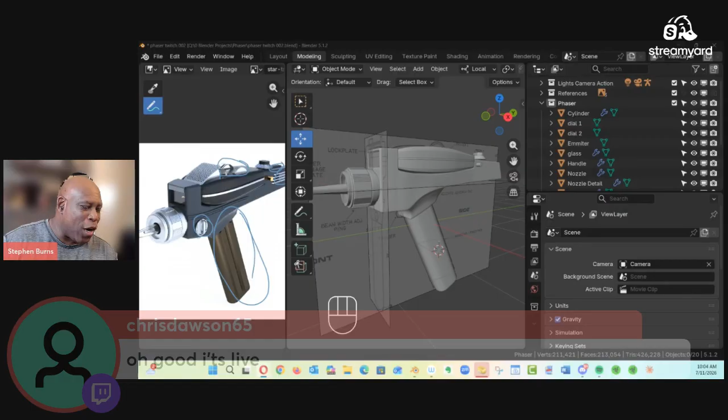So I wanted to share with you guys, I'm one of the newest team members of a podcast called Trek Worlds, in which Michael Hodges, who's here with us, is also part of that team. Michael, did you want to come on and talk about it a little bit?

You want to come on live? I gave you the StreamYard link. Trek Worlds rocks, yes it does. I'm really quite impressed with it.

Let me bring up a page, I'm going to go to, it's a YouTube channel, and I've got, let's see... oh, that's kind of different. StreamYard is doing something a little different.

All right, so let's go and search for Trek Worlds. Let's go ahead and type it in. Okay, so Trek Worlds, it should come up here. Let's see, is it coming up automatically? Let's hit the enter button. It should be coming up. I just did this the other day and it came up first thing.

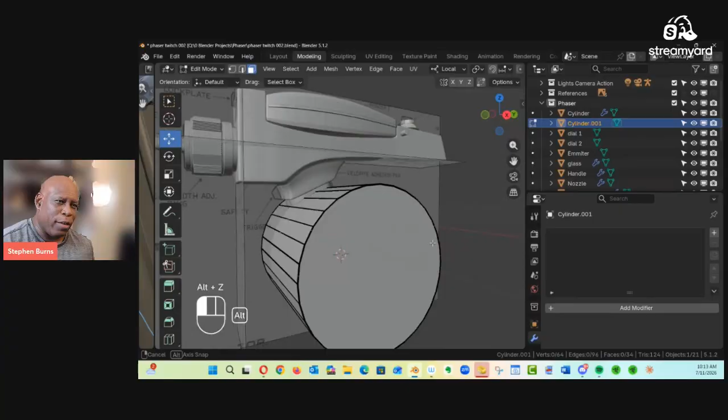Next, we're going to make this as simple as possible. We'll go into edit mode—tab key—and switch to face editing. I want to make sure I'm in X-ray mode. I deselected everything; if I rotate this a bit you can see everything's deselected. I'm going to select the faces—not the Z key, that's not what I meant to do. I meant to hit X and delete those faces. They're supposed to be gone now, but I didn't actually delete them, so X key and faces again. That's why it's always a good idea to get in close and rotate after applying a command, to make sure everything's been done—sometimes you think you're doing something that you're not. Good idea to get in close and inspect it.

All right, let's make this approximately the size I'm going to need. Go to the side view, go to X-ray mode, and basically what I'm trying to do is use these curves to simulate this curve in here.

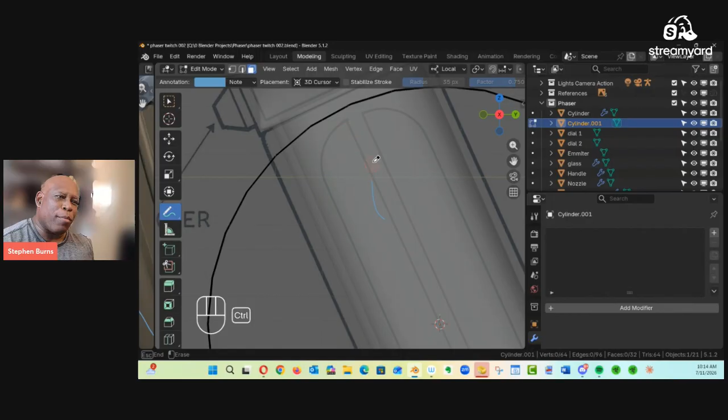And then stretch the rest all the way down, right? Just use my imagination, just looking at the basic primitives that I've been given. And what can we do with those primitives? I'm going to pull this out so I've got a double layer here. I like working with a double layer.

Okay, so hit the A key for select all. Let's hit the S key and scale it down. And let's bring it on up here like this. Get up here close. Scale it down. I'm going to take it to something.

I'm going to kind of match that curve in there as best as I can. And I think I can. Something close to that, I think that's almost there. How about S again and pull it up slightly? That could work.

All right, let's see what I can do. I think I may have to do this a little bit of a different way. Probably, let's do this, I'm going to pull it down this way. Let's take it to right about there. Maybe I had it right the first time. I'm overthinking it now.

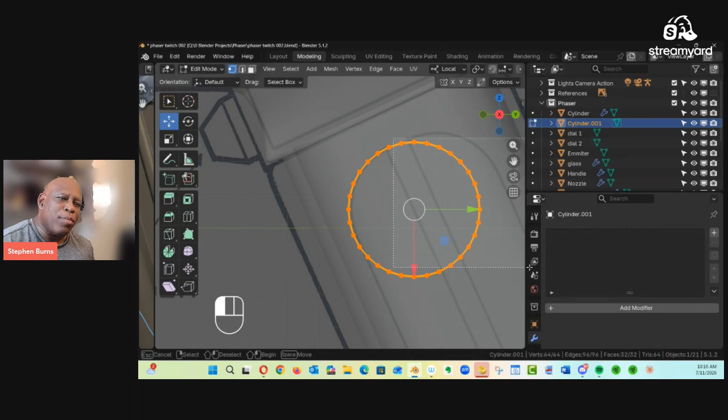All right, so if I select these points here, and I'm also going to select these points here. It's going to be a little bit different than how I plan to do it, but you get the idea. Let's kind of basically get here. All right, so what I'm going to do is this.

I'm going to get rid of these points, I'm going to dissolve them. Control X dissolves them. I dissolved too many. I want to keep one more over here. I'm going to undo it. I want to keep that one. So...

I'm going to keep this one here. Let's go select this one. Still... oh, control, there we go. Control right click. And let's select all these here. That's good. Okay, so control X dissolve. That's what I want. All right.

I want to go grab this, bring it on down. Now I've got two of these here. So what we'll do is this. Let me undo it real quick. Let's go grab all these points here. Let's just get rid of them.

So I have a flat plane. That's going to make life a lot easier. Go grab this point here, bring it on down. Let's grab this point here and just kind of push it into place. This will all make sense in just a little bit. Grab these and just bring it all the way down to here.

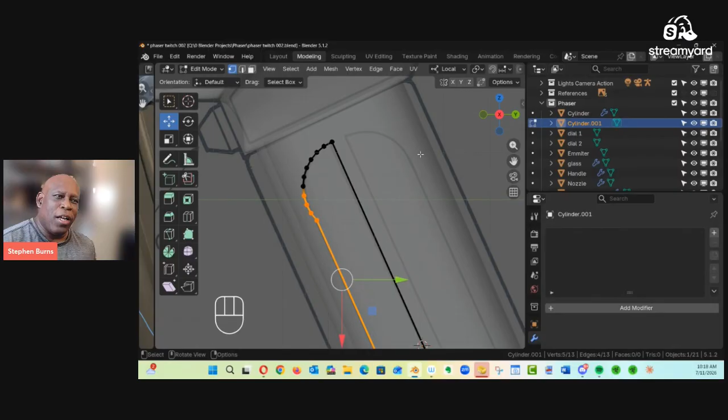Now, in Blender, this is going to be easy. We have our loop tools, a plugin that comes free with Blender. Right-click, loop tools, go to flatten, and it should have flattened that out. All right, we want to flatten that out. Let's see, on the x-axis. All right, it's not working.

All right, so we're going to do it this way. I'll tell you why. Let's rotate it, select all. Hit R for rotate, we're just going to align it with the world orientation. It's going to make things a lot easier.

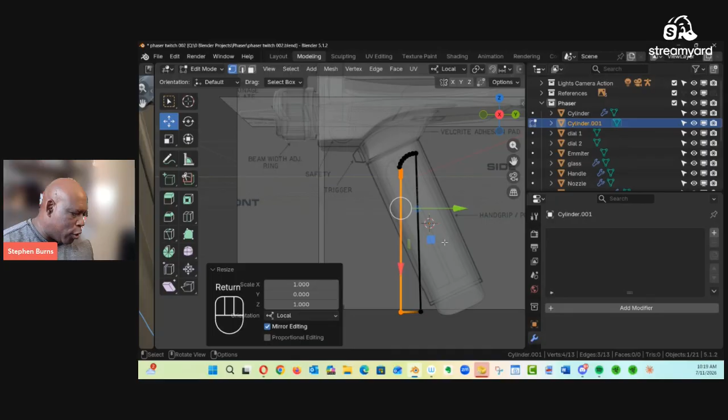All right, then we'll come back. We'll grab all these and that. S key for scale, Y for the axis, and 0 to flatten it out. Enter to commit the changes. And we're just going to push it in place. There we go, that works, that works. Okay.

All right, so we're going to end up with an N-gon here, but we kind of don't care, primarily because we're going to integrate this in with the handle. We could make this into something that's 4-point polys everywhere, but we'll deal with that a little bit later.

All right, so we need a face on this. Go to my edge editing view because I deleted it accidentally earlier. I'm going to get rid of that. With all that selected, let's flatten this out on the Z-axis according to this here. So S key, Z, 0, just to make sure everything's nice and planar. And hit the F key for fill. Okay, and there's our face.

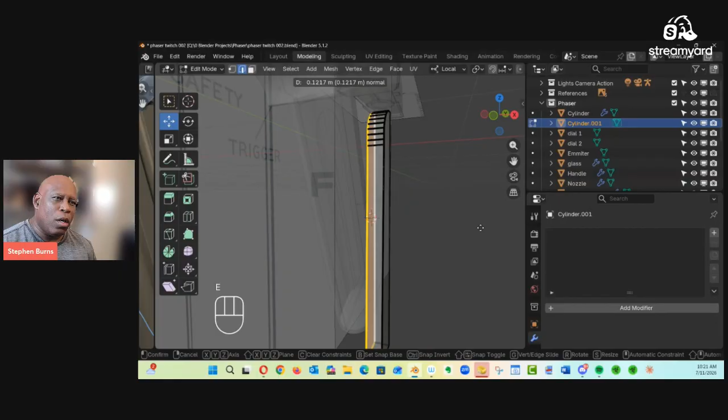All right, and then from here, let's go ahead and give it an extrusion. Yeah, it looks pretty good. Let's make sure. Get out of X-ray mode, see what we got. Yeah, that looks good.

All right, let's go back into our side view. X-ray mode, A key for select all. I'll have to do a little bit of manipulation, but that's okay. So we hit the R key, something like this, it's kind of getting a little closer. It might have been easier to hit the A key.

There we go. Go to orthographic view, and let's take a look at my lining here. So R, line it up a little more accurately like this.

Go to my edge editing views. I've got an edge down here. Let's grab this and place it right where it should be. Let's grab this edge here to there. And that looks pretty good up here. If I select all this here, push it on down.

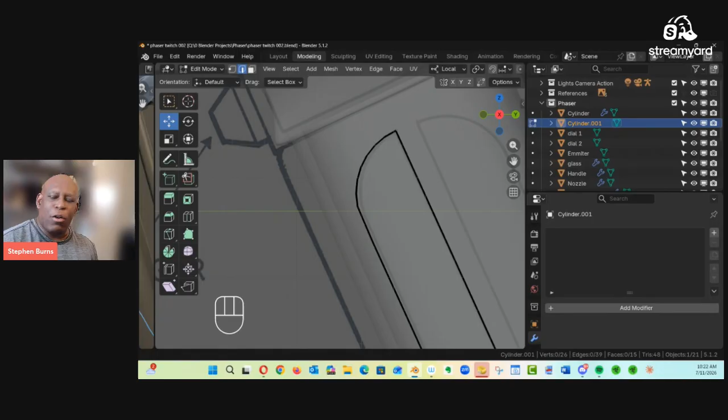If I grab all of that, actually, what we'll do is I'll use my proportional editing. I'll grab one of these little edges here, like this. As you can see there, go to the side view, and then turn on proportional editing. So the O key is a shortcut for that, or I can hit this little symbol right there, it looks like a ring around a little dot. That's proportional editing. So when I hit the G key, I can adjust the size of my falloff and adjust this to get it just exactly right there.

Okay, that little edge there is just a teensy bit off, so I'll just kind of move it into place. That's good enough. We're done.

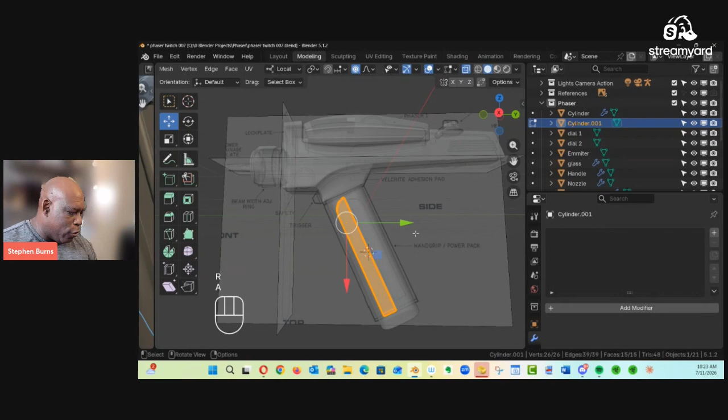All right, we'll do one last little thing. Let's go ahead and bring this straight up and down again, and I'm going to flip it, rotate it. Let's hit the A key first, and then we'll hit the R key, and just get it as vertical as possible.

Let me go to my orthographic view. I'll use one of the lines to kind of line it up, you'll see why in just a minute. And to help me out a little bit, I'm going to bring this down, set it against one of these little virtual lines there. That looks pretty good.

R key, and just rotate it just slightly like there. I think that's it there.

All right, now the reason I did this is I want to go to my modifier. I want to go to a mirror modifier for this. So let me get out of here, go to this mode here, right click, set the origin to geometry, because the origin is way up here in the handle, that's where we originally created it. I don't want it up there. So right click, set origin to not the 3D cursor, but to geometry.

Right, and this is interesting. I don't know why it's setting it up here. I don't see anything up here. Let's do it again, right click to geometry. Interesting. That's not exactly where I want it.

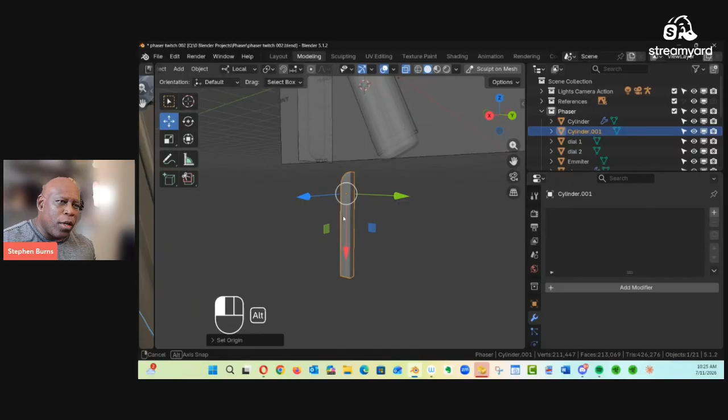Here, this is another way we can do it too. If I want it directly center, go to my edit mode, everything's selected here, and it's still selected there. Is there another? Interesting, I wonder if there's anything extra in here. I'm expecting this to be dead center, and I'm trying to figure out why it is not.

I'll look at my options up here. Median point's correct, I don't see any other. If I hit the A key, I see nothing else up here. Interesting, I have to figure that out later then.

So I'm going to hit object mode, go to my mirror modifier, generate mirror. Let's go on the... you know what, let's do this, let's hit Control A for rotation and scale. Okay, now let's hit the Y axis to mirror this on.

And if we go inside edit mode, we can do this quickly this way and just move it like this. We'll just eye it. Now that I've got it aligned the way we need it, all I need to do now is come up here to object mode and just move everything back into place.

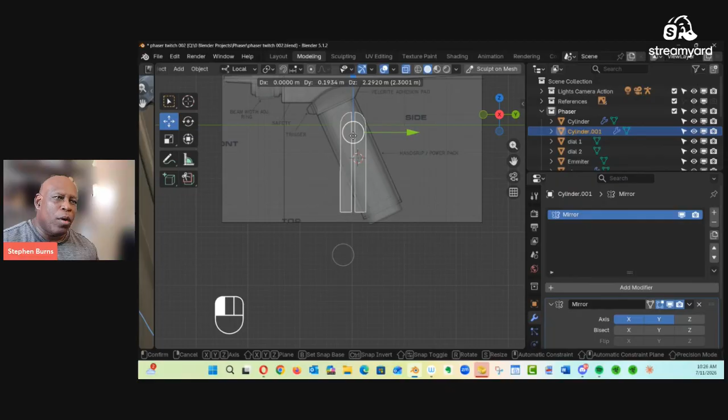So go to the 3 key, pull it on up, or rotate it, kind of get it approximately right, and then we're going to get in close again and just move it manually right there. So it's a little bit off from rotation, no big deal.

R key, rotate it right about there, maybe a teensy bit more. There, okay, let's take a look at it. Let's get out of X-ray mode. Push it on in like so.

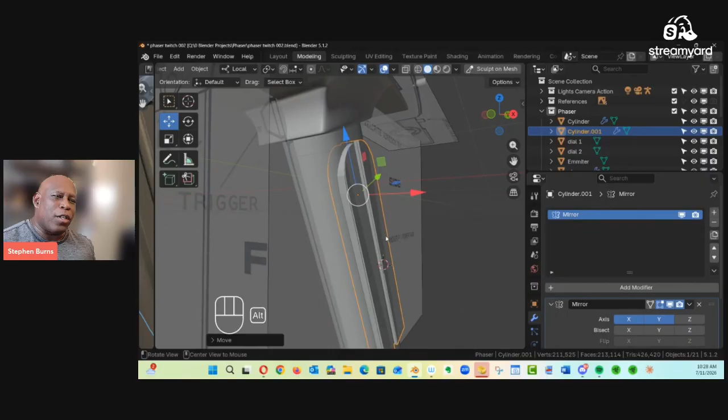I'll deal with the thickness in just a minute. I'm gonna push it in. I want to rotate it - this is the reason why we went to the modifier. I want to rotate it so it's showing that it's moving along the plane, the surface, flowing along the surface of the phaser.

So come here, go to edit mode. I'm going to select all. Let's go to my rotation option up here, and let's just go on the Z-axis like that, yeah. Okay, I got 2 axes selected here. Turn off the X, there we go. I inadvertently hit both the X and the Y down here. Actually, I didn't, because X is what it is by default - I just didn't turn it off.

Let's see. There's some comments here - haven't worked with the Galileo in a few weeks. Well, it wouldn't hurt to show it anyway. From Michael, let's see - Chris says the circle you made at first.

Yeah, well, it was. I used a cylinder at first, just rotate it so that it's facing directly at us. Then I utilized that curvature along the sides of the cylinder to create the shape.

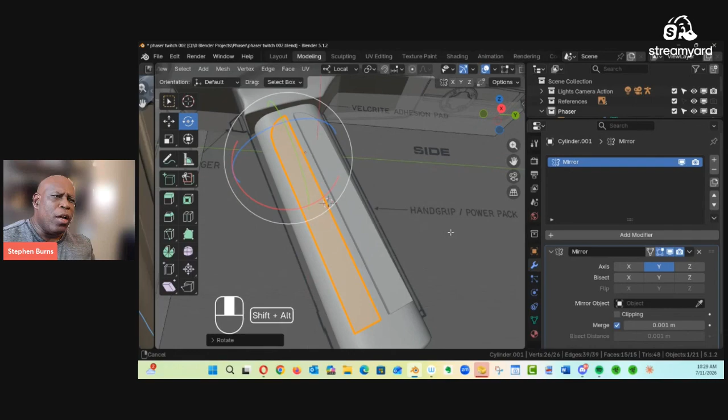He's saying it's using that as a center. It is, that's right, it is. Which I didn't expect it to, because whenever you select something in Blender, it goes to the dead center of whatever it is that's selected.

So the fact that it's moving up here, local - let me see something. Orient - yeah, this is perplexing me a little bit, because it should have gone directly to the center of my object. Let's say individual origins - see, that's a little odd. To me, I would think the center would be right down here in the middle somewhere. So that's what's throwing me off a little bit, but no big deal.

I can go to normal view. I know what Blender is doing and why. I'm going to hit the A key one more time. Just so I can - I think I want to rotate it just a teensy bit more, like that. Okay, that works.

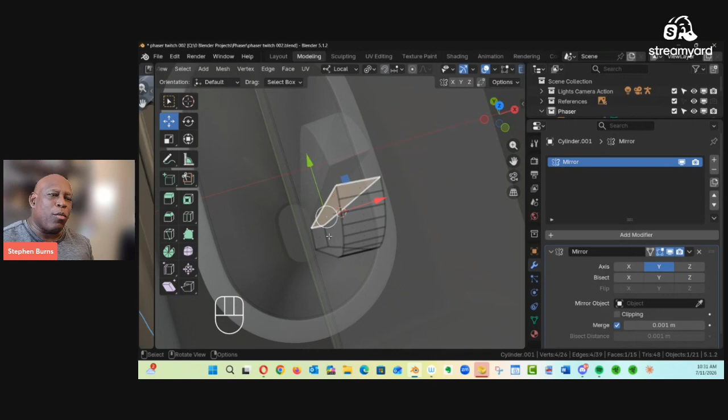Okay, that works. All right, so the inside of that piece, if I come over here, I want to grab the front face. If I can go to my X-ray mode - let's see if I can, there we go, got that piece there. Because you may want to use this to put batteries inside, so I don't want this back face too deep into it. So I'm gonna - I grabbed the wrong thing. I want this face here. That's what I wanted.

And if we go to the orientation instead of local, go to normal, it'll adjust the orientation to the face, the normals of this face here. So I can just take it and push it up like this. There we go - see, and that'll leave you plenty of space to put wiring and batteries and stuff inside. So the idea is to 3D print this.

Now I think probably an effective way of dealing with this now is probably to bevel those edges a little bit. We could put a bevel modifier on here, right? We could put a bevel modifier on here. So let's give that a try. Let's go over here and go to object mode and get out of here. Go to solid mode and let's give it a bevel. Let's see how well it does.

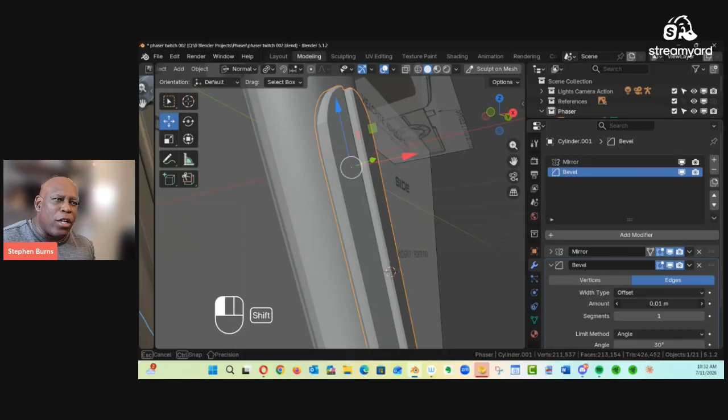Okay, yeah, it's going to do great. Okay, adjust this, holding the shift key down so I have minute adjustments like this. See that? Okay everybody, I'll turn it this way so it's easier to see. Holding the shift key down, give it a few more segments - I like to keep it odd numbers like this.

All right, and this is going to be helpful because if I want to smooth this out even more, right, and I'm looking at my phaser, and this actually is going to be going in a little deeper like this, right about there. Yeah. And I think I'm going to move this over a little bit - I think this is a little bit too far. Probably, well, maybe that's okay. Okay, maybe that's okay.

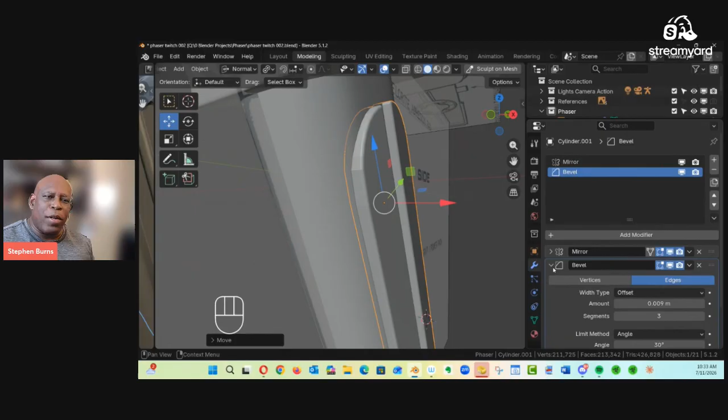If I wanted to smooth it out even more for the purposes of 3D printing, let's try putting a subdivision surface on it. Let's see how well it works. Yeah, there it is. That's what I'm talking about.

I'll go up to a level of 2. Yep, that's smooth. That'll 3D print just like this. Why? Because if we right click on it, it should always be under the shade flat option, right?

And we are in shade flat for everything here, which means what you see is what you get. All right, handle's done. I can merge these together through a Boolean, but I won't do it just yet, just in case I want to make modifications later on. You don't really need to—I'll share why later when we actually export this as an STL file.

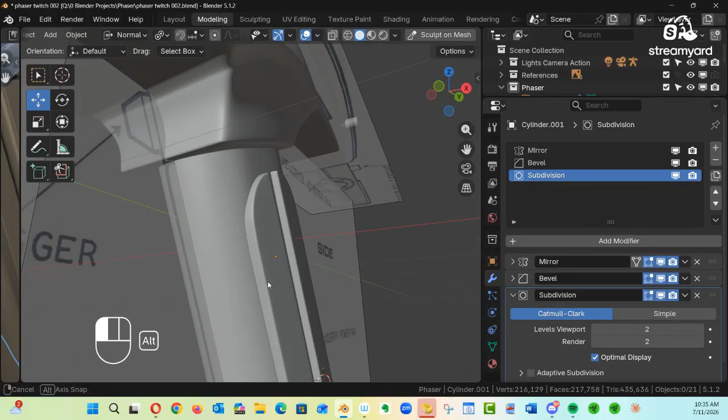Okay, so when you export this out as an STL file, you can tell Blender to automatically merge these together in the export process. So I don't really need to Boolean them.

What I will do is select what I call the handle detail right up here. Actually, it's called a handle now. If I click on the detail, it's called cylinder, right? So I'm going to call it the handle detail, or details. There we go.

And then I'm going to shift click on the handle, hit Control P, and parent it. All right, so now this is parented to the handle.

To help keep me more organized, I want the handle to be in its own group. So with both of them selected, I'll select this one here, shift select the handle, and hit the M key, and make a new collection. We're going to call this one handle.

Okay, now we've got the handles in here, with the handle details parented to it. Now we can keep things organized.

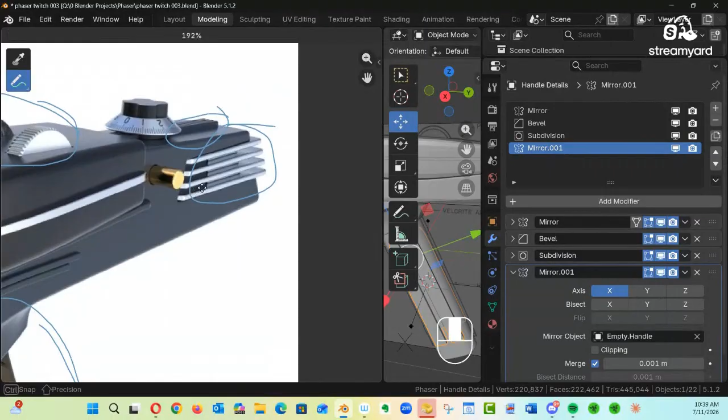Let's start doing the details along the sides of the phaser, right along here—see that? So these are heat sink grids, if I remember correctly. Along with these back here, we've got an indentation going into the back of the phaser. You see it's actually etched into the big square face, and then the heat sink blades are placed back there accordingly.

So that's next—let's do these here, then we'll come back and do the back.

Okay, so first thing first, let's go do the main phaser. Go to the body of the phaser, hit the 3 key, go to the side view, turn on X-ray so I can see through it. You can see there are 3 of them, right—let me add my little annotation. I've got one here, another one here, and then one right down here, going all the way across to the front. All right, so let's go have some fun.

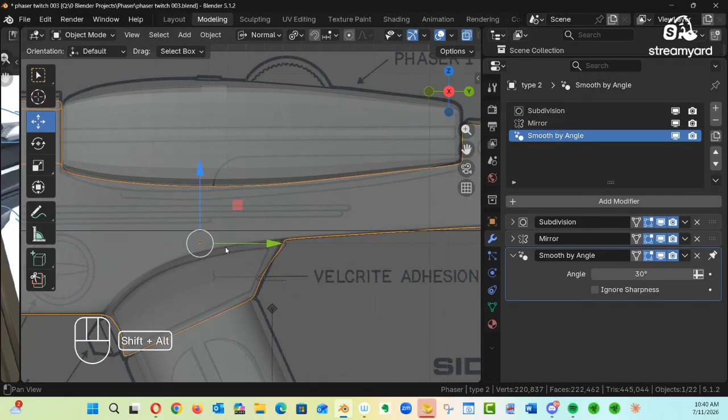All right, so I think what I'll do is use a plane. We can use a good old plane. So there's the body of my phaser here, Shift S, cursor to selected, so I can bring my plane to right about here. We're going to make, let's see what I've got up here organized inside my collections.

I got the phaser itself. I'm going to need to call this one phaser type 1 because I'm going to separate this from the type 2. So phaser, let's get organized now.

Now I need to go to my type 1 and all the components of the type 1. So that there, this here, holding the shift key. Let's see, am I still in? Giving me a hard time here. So grab those there. Yeah, I think it's just those two for the type 1 phaser. Control and get rid of the body.

M key for merge, now just hovering over the selected objects. M key, new collection, and we're going to call it phaser. Keep it consistent. Type 1. There.

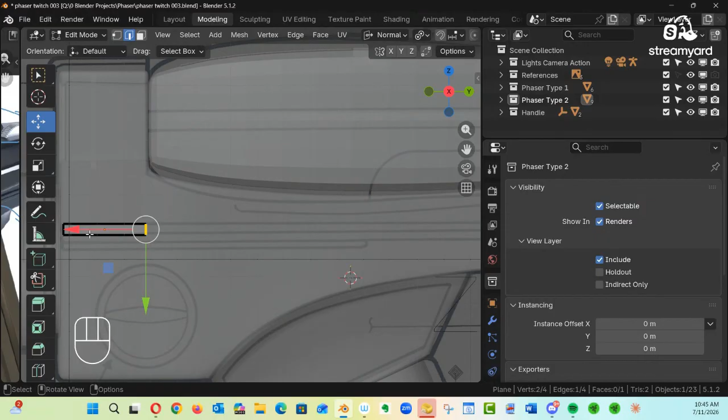And let's go back to X-ray mode. So 3 key, X-ray mode, Alt-Z. Get back into edit mode here. Edge editing mode, grab that there. This part you're going to love. Bring this on over like this.

Okay, I'm looking at the location of this thing. That looks about right. This looks like it wants to go up that way a little bit. That's okay, we can do that. And if I look at my phaser in my hand, while I'm looking at the drawings, all those lines are consistent. They're not... they're tapered just slightly, aren't they? They are tapered just slightly. All right, fine, so what we do is we're gonna just taper them just slightly.

So hit, you can go to the scale tool if you want and just push it up like that. It's a slight taper.

Go to X-ray mode, and it's good. All right, I think this is going to work.

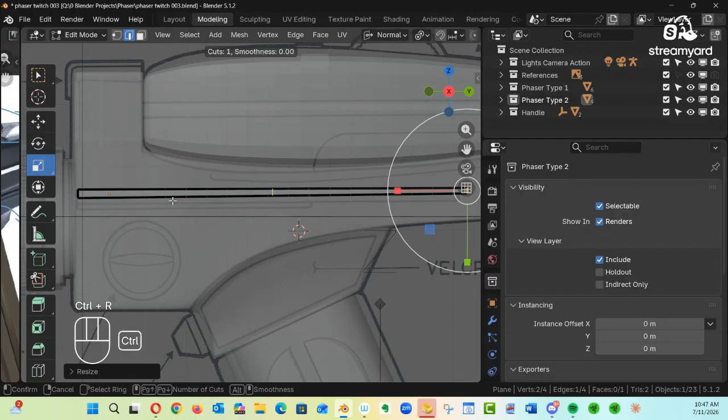So now this is what we need to do. We're going to do something kind of interesting. I'm going to subdivide this. Control R for slice, and roll my scroll wheel like this to get a bunch of slices in here. Then click once, click again, and commit to changes.

I'm getting close, and I'm going to slice it again. Control R, but this time horizontally. I'm going to add one more slice like this. I think this can work. Then click once and click again.

Okay, now this is what we're going to do. We're going to shrink wrap this to the body of the phaser, and then we're going to extrude it out of the body of the phaser. Isn't that fun? So let's go to work, let's get out of here, go to object mode.

Now let's turn off the references temporarily because they're a little bit in the way, and let's pull this panel over here to give us a little more real estate.

Okay, select this detail. We need to rename this one, right? Let's go back to the phaser type 2, it was the plane. I'm trying to get it to react to me clicking on it here. There it is, okay.

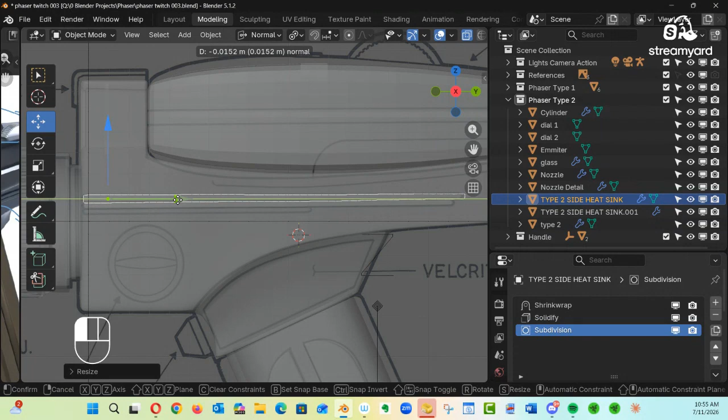Like so, and then push it on over like that, just to match what I have in the photograph. And this one's going to be stronger, so S key, Y. There we go. That works. So if we get out of that mode, see?

1, 2, we need one more, right? Okay, go to the 3 key on the keyboard, X-ray. Let's go get that one on the bottom - heat sink number 2, that's number 1 here. So we'll just hit Shift D and then the Z key, move it straight down like this, like right about there.

Okay, now what I want to do - this one's slightly thinner, so I suppose I'll hit the S key for the scale, Z key for the axis to restrict it to, make it a little thinner. S key for the scale, and then the Y key for the axis to restrict it to, and bring it down. Let's see, it's about there, like that.

Push it on over, get in a little closer, maybe move it up slightly like that, move it over more like that. Okay, let's take a look. Yeah, there it is - done. That one's done.

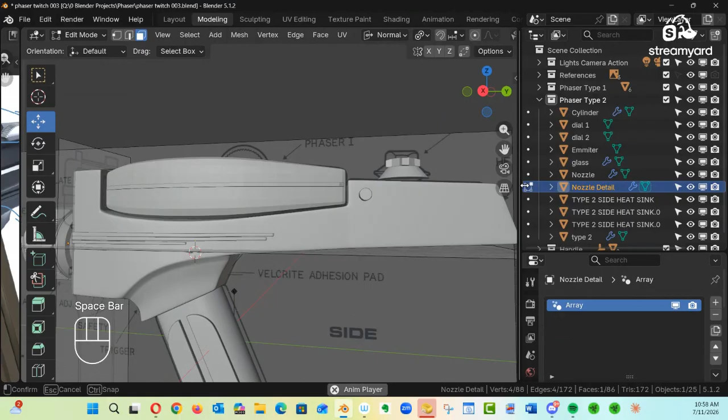This one's going to be fun, because let's select the phaser itself. Okay, let's get out of there and go into edit mode and let's strategize. Pull this on back. Okay, we're going to strategize this here. Make sure I've got the right thing selected. There we go. All right, let's get in close. So let's also go to X-ray mode.

All right, so let's think about this. If we have those heat grids in the back, the heat grids are basically big - they're sunken into kind of a square shape, right? So back here, if you look at this - somebody should go to my annotation - this whole shape here is etched out, this whole shape in here is kind of etched out. And then you've got the four blades, heat sink blades, that are placed within that little space in there, and of course they hang out from the sides and they hang out from the back a little bit.

Looking at my phaser and touching my phaser, they do extend out beyond the sides, left to right, and also to the rear as it's showing here. So we're going to start with that first. Now we can actually create that out of the geometry that we have here - we do not have to add a boolean or anything to it, right? We can just etch it right into it, or build it right into the shape that we've got. So this is why polyflow and keeping everything in quads is so important.

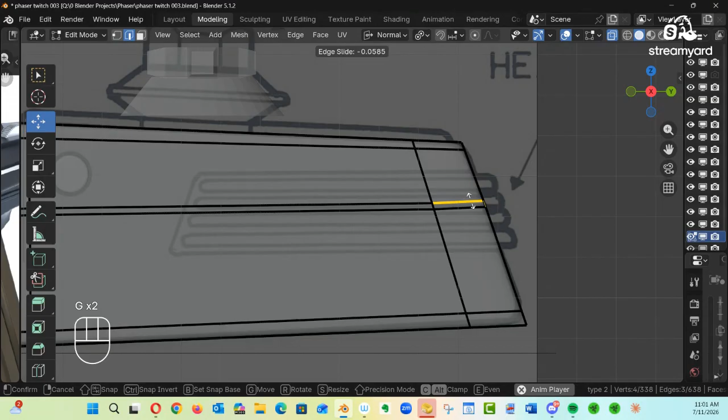We're just trying to align this up to the plates here. So double G. There we go, that looks good. See? Just trying to get that looking as consistent as possible.

Now here we go, 3 key on the keyboard. Let's go ahead and create some geometry in which we're going to etch this out. So let me go back to my annotation and let me go to object mode. There we go, annotation, and just erase all that extra that was in there out. There we go, and let's go. All right, let's go back to edit mode.

Just getting rid of the visual distractions. All right, now Control R, I'm going to slice it. Why? I need to represent something for this side. So if you get in close here, this outer edge is the area that's being etched into the phaser. These other little sections are the actual blades, heatsink blades. With that there, see, I've got that whole loop.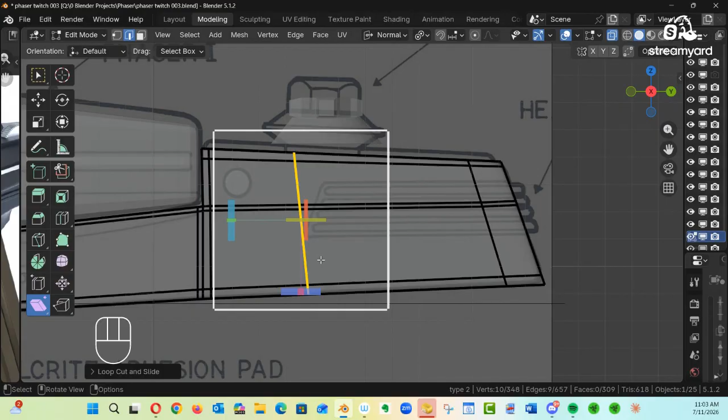It's a quad loop. We're going to come down here to an option right here called shear. Select it. Once that's selected, I look at the area that's parallel to or perpendicular to the very thing I want to shear, and then I just slide it like this. And there you go.

Done. Go to the move tool. We're not going to go to the move tool because we don't want to mess with the shape, right? We want to keep the shape. So it's double G, and you can slide it anywhere along that shape without affecting the shape. So right there is where I want to be. Done. Maybe I do a little more. Double G and slide it right about there.

Okay, need one for the top. Control R, put it there. Done. Control R again, here. Done, okay. Did it mess with the shape of your face? Or no, it's probably going to add to it or benefit you because adding a little extra geometry that'll help keep the shape. If you're not sure, go to object mode, get out of there, and just take a look at it. And it looks great, looks clean.

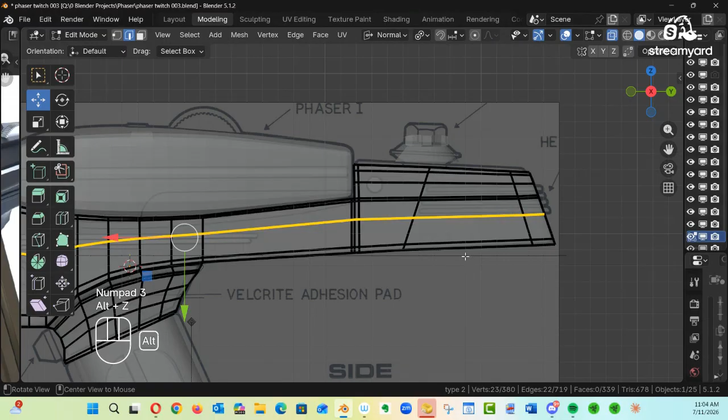All right, it's looking great. Let's go to tab key, edit mode. All right, now let's go back to our side view and x-ray mode, and let's go finish this up. So we've got everything exactly where we need it. So 3 key on the keyboard, and to go to face editing mode, and we're going to select all the appropriate faces.

This is what we need. Right? This is what we need. Now, what we do is we're going to go etch into it, and we're going to etch into it by using an extrusion method.

So Alt E, not the regular E, and then select from the options, extrude faces along normals. Select it. We're going to bring it in just a little bit. Just a little bit. We need to bring it in more. I'll tell you why we're not bringing it in more.

You see these faces here. Actually, let me undo it. Control Z. Now let me hit Alt E again and extrude along normal. If I see those faces moving in too close to one another, they're going to start to overlap like this, and it's going to screw you up. We want to go in about this far, but you look, the faces, because Blender's trying to get those edges to match the flow of the shape. So they're overlapping, so only going to do it to right about there.

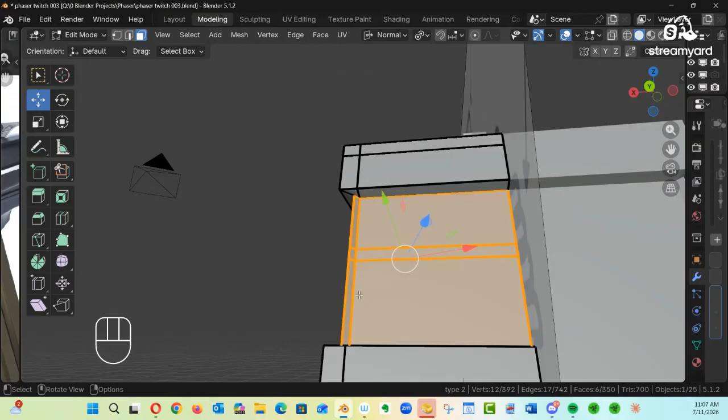It might help to turn off the subdivision surfaces mode. Okay, select all of these here. That's all I want. And all we want to do is right click, loop tools, flatten.

So this is not flattening the way that I wanted it to. Very odd, by the way, loop tools flatten is usually religiously accurate, and this entire face should have just flattened out. Let me do it again to see if maybe I have something else selected. Go to X-ray—no, everything is exactly correct. So this is odd with the loop tools. It shouldn't be doing this. Right click, loop tools, flatten. And now it did it again. Huh, it's usually pretty good.

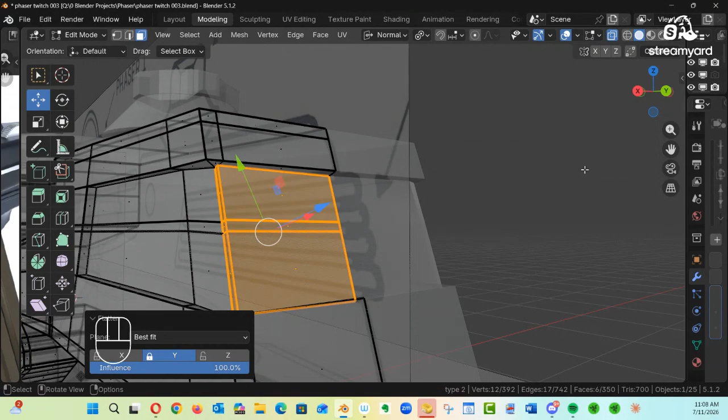Let me go to the flatten options. Influence 100%. Let's do it again—loop tools, flatten. And it just keeps doing it. Very odd. All right, so what I'm going to have to do is a little manual work.

So it's these faces here that I'm concerned about. I suppose, since I'm in normal mode, it has the z-axis along its normals, which is exactly what I want. All I need to do is go at an angle here, get out of this mode, and just push it up like that. There we go, see, it's starting to flatten out here. That's what I was trying to do. So maybe if I do this, it'll help a little better.

So before I do anything else, I'm going to grab that along the top, deselect everything on the bottom, right click, loop tools, flatten. There, it flattened it along the tops.

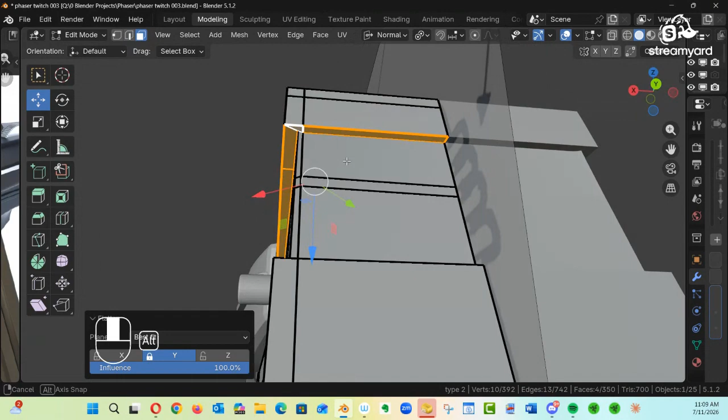Let's go to the bottom. Grab that one, holding shift and control to grab this one. Right click, loop tools, flatten. There, that flattened out accurately. All right, let's see if this will do it now.

Grab this here. Right click, loop tools, flatten. That's still having a little bit of a problem, but it's no big deal. I can easily manually correct that—I think all I do is grab this point, just grab that point there. I think what I'll do is pull it out right there. I think that'll work, pull it down a little bit like that.

And eye it a little bit. We can see this is a little bit off in the back. So if I go to my edge editing mode, grab these edges here, hit double G and slide them down. Grab this one, double G, slide it down to kind of keep the flow linear in this respect. Okay, that works, we've got it.

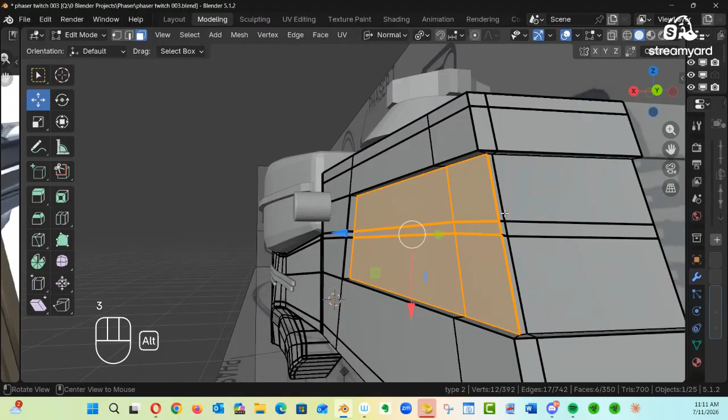Now what can we do? Grab all these faces and grab all these faces here, and we need to be not in normal mode but in global mode for this one, because everything is aligned to the global space. And just push that in like this. There you go, so just understanding polyflow.

Select these outside faces, and I'm going to right click, loop tools, flatten. Looks like it's already flattened. And just push these in like so, just eyeing it. Okay, that did it.

Let's see if there's any questions here. And you know I mean it. This is awesome, good, thank you Chris, and everyone.

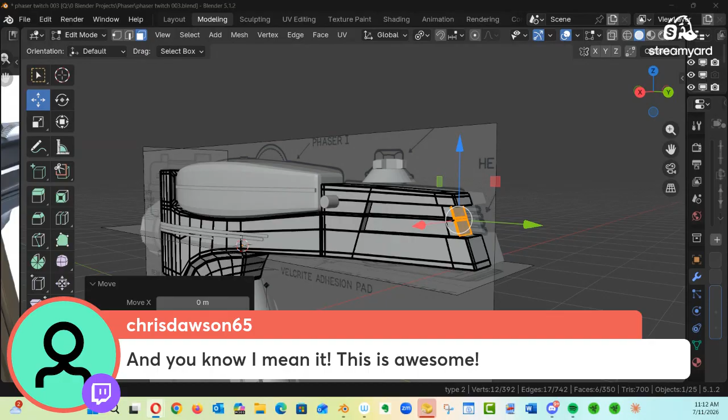Yeah, once you understand how Blender works, you just use your head and think it through. I suppose what I could do, because these two edges are kind of close to one another, I could grab these edges here, grab that and this, holding shift and control, and then just double G it and slide it on over like this, just to give it some breathing room. Okay, that works.

All right, so it's done. Now here's the fun part—let's get out of here, go to object mode, and let's take a look at this. It looks good. Let me pull this panel out a little bit. References, turn off the references. Now let's turn the subdivisions on for the references. This is what I've got.

All right, so most people, when they go to subdivision surfaces, they panic. Let's understand what subdivision surfaces are. You guys are probably used to CAD-based software, where the CAD-based software is creating the corners for you. That's exactly what subdivision surfaces is—it's a combination of box modeling and CAD-based cornering, all based in one. So what we need to do is tame these edges to be accurate. So if I come over here, go to tab mode, go to edit mode, right?

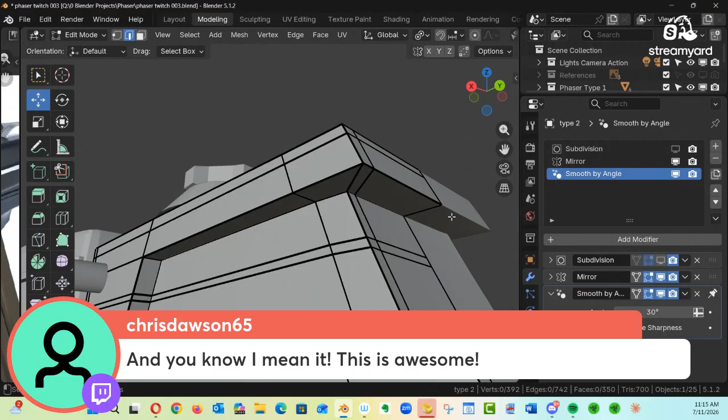All I need to do is find a way to control these edges. The best way to understand this is by turning off subdivision surfaces temporarily. I need to tame these edges in here and the edges out here on the left-hand side. I can tame the interior edges pretty quickly, because everything is a continuous connected loop with 4-point polys.

Control R, put it here. You see this? I can slide it in here to tame this inner edge. I'll place it here like so. And if I turn it on, see, I'm starting to tame that inner edge.

Let's go tame the edge up here, right? At the top. Control R, click and hold, and drag it to tame that edge. See that? See what's going on? Now we need to do this one back here, right?

You look at this curve, we need something perpendicular to this line to tame this curve. Control R, left click and hold, tame the curve until you can make it as round as you want or as hard as you want, like that. All right, there we go. Done.

You've got the software interpreting the curves that you want. So you're going to need these beautiful curves to 3D print, and you've got the edginess that you're looking for.

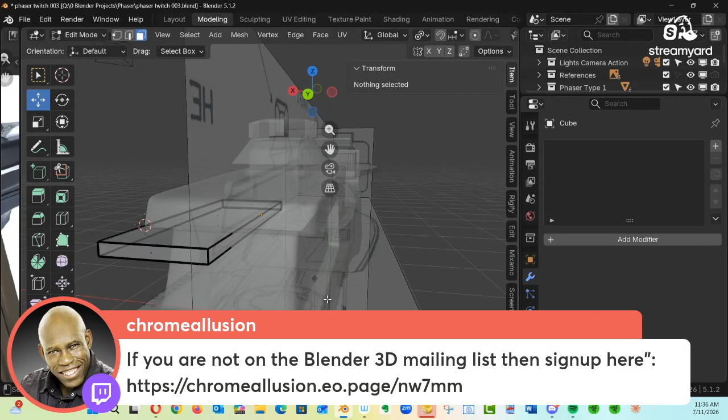At this point, we're going to go back over here to object mode and go to my mirror modifier, add a generate mirror modifier. It should mirror automatically by default right there. But if we go inside here, once again, go to my edit object.

Hit the number 2 key to select all of my edges. I want my orientation to be exactly where the orientation is selected now. So Shift S, cursor to selected, get out of here. Now the cursor is placed exactly where I want it to be. Go to object mode, right click, set origin to 3D cursor, and boom, there you go. It's perfectly aligned.

If we get out of X-ray mode, you can see exactly what it looks like. And then from here, we're going to come over to my mirror modifier and make sure clipping is activated right over here. Make sure clipping is activated. That's going to help. All right, cool.

I'll keep my eye on the chat box.

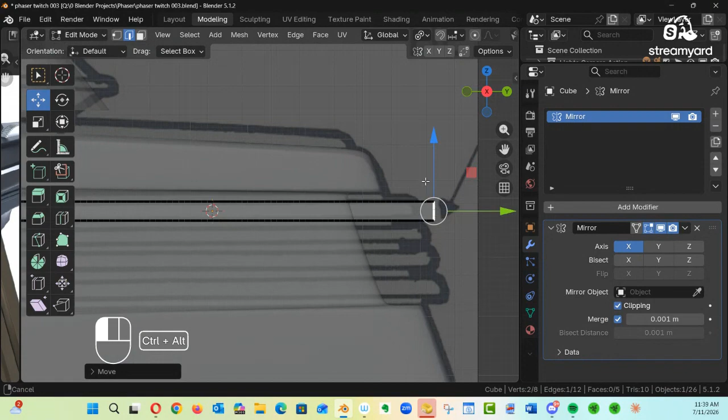Okay, let's go back to my X-ray mode, go to side view. Let's hit the N key to make that panel go away, give myself some real estate. And if I get in close, I want to kind of match. I want to make sure I go to face editing view and select that entire face. See, I want to select it right about there.

We'll do the same thing here. Let's bring it back a little bit more like that. I think we've got it.

Okay, here's the fun part. So I want 4 of these, and I want them to be tapered along to the shape of the phaser, or the phaser indentation that we have back here. Okay, so I want all these faces to kind of flow along with the angle that we have in the back and the implied angle that we have in both the interior and the back portion of the phaser here.

Okay, now let's add another modifier to this. Let's go back to object mode, back to our X-ray mode, go to the side view, and we're going to add a modifier called array. So I want to array this 4 down. We want to do as little work as possible, time is money.

So add, generate, go to array. Very top is in alphabetical order, and I'm just going to go array legacy, it's all I needed. I want to array it down the Z axis. Here's the array, it's by default around the X.

I'm going to hit 0 for X and go 1 for the Z. And it's going upwards, I wanted to go negative, right? So I'm gonna go -1, put a negative in front of it like that. It's going downwards. I need 4 of them.

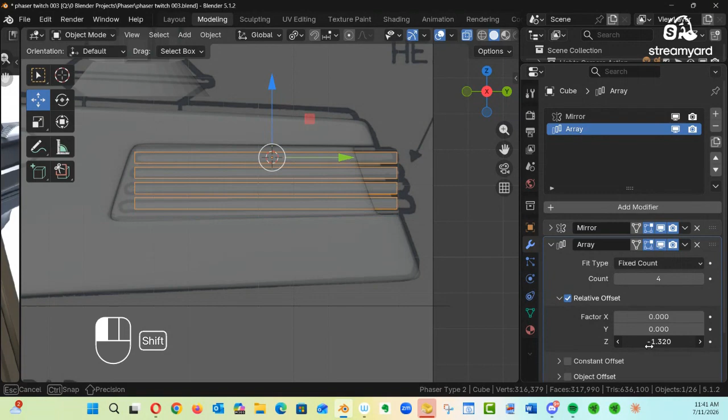So add 2 more, like so. And then all we're gonna do is just come down here to the negative Z axis, hold my shift key and click and drag to the left to decide the spacing in between. And there we go, probably something like that. That's my spacing that I want. That works, so now we take a look at it. We're making progress.

So now we need to taper this thing. To taper this, what I need to do is apply all of it. So go to my array, come right over here to the right-hand side of the array, hit the little down tick, and it's going to give you options. Hit apply, and now all that is applied to one object.

So I'm going to call this one rear heat sink. Double click it. Rear heat... spell this right... heat sink.

If I go into edit mode for this, see I got real geometry everywhere, and it's in the shape of a cube, which is perfect, right? Exactly what we want. So we go to the 3 key on the side for X-ray mode here.

Grab just those faces, what do you do? You know what to do. Right there. Go to my shear. Shear that puppy. Oh, well, kind of work that way. Let me see what's going on.

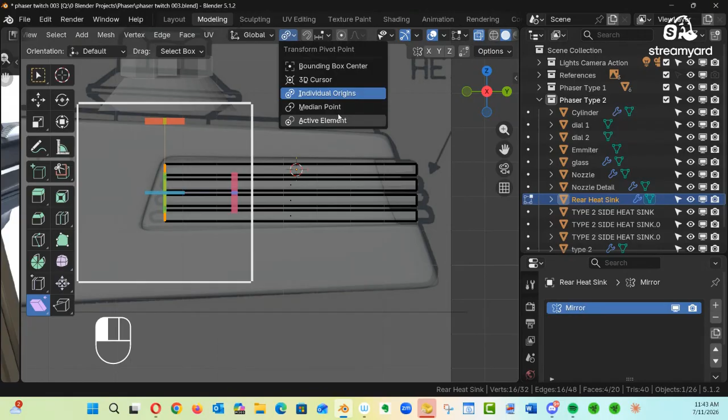You know why it's doing it this way? I know why. Because right up here in my options, see where it says global? Just to the right it says individual origins. I don't want individual origins, I want a median point where it treats everything the same. And now I can do this like that.

Isn't that awesome? Somebody's got to say that's awesome. I'm going to play with that a little more like that. That looks good right about there. Okay, move tool and move it into place.

Do the same thing to the back here. Get in close, just grab those faces. That's all the faces I have, that's all I need. Go to the side view, come down here to the shear. Go to the line that's perpendicular to the area I want to affect, that front face, and just drag it just like this. Move tool, pull it on out.

Okay, that looks great. Let's take a look at it. I think that'll work perfectly. So take a look at it from all angles, and that's great. That's perfect.

From here I suppose we can give this a little bit of a bevel. I think a bevel modifier might work on this one. So generate bevel, yep there they are. I don't want that much of a bevel, so I'm going to adjust it, something like that. There we go. Now we're going to add on several segments, 3 and 4. There we go, we got the rounded edges going on here.

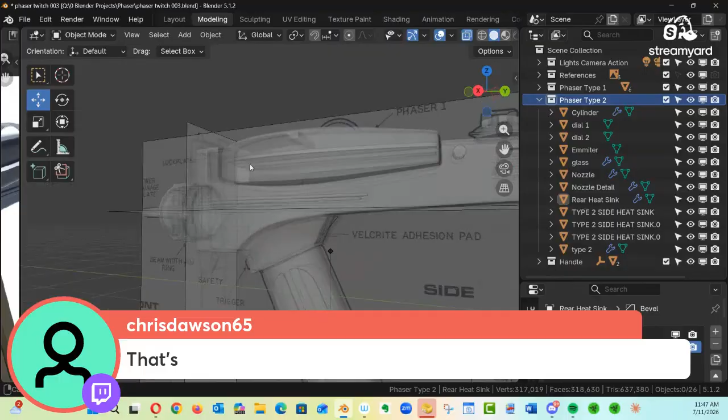Okay, let's go get those heat sinks real quick, should take us like a minute to do. So go to my top view. Let's get a box, Shift A, mesh, box. S key, scale it down like this.

Right, get in close, okay that works. From here, Control A. Right, let's kind of place this exactly where I want it. I want it right up here in the top. So go to the side view. That's going to be right up here like so. This would be a little thicker.

So tab key, edit mode. I'll go grab the top, push it up a little bit. And I want to push this down into the body of the phaser so that if it's going to 3D print, as a continuous face, that's what your 3D software is going to see, or your 3D printing software is going to see. All right, here we go.

Let's go ahead and elongate this one. So go to my side view here, get in a little closer. This is going all the way to the end, right? So grab this face, that face only, pull it all the way to the end, just like this. Take this one, pull it all the way to the end. This one's going to taper, right?

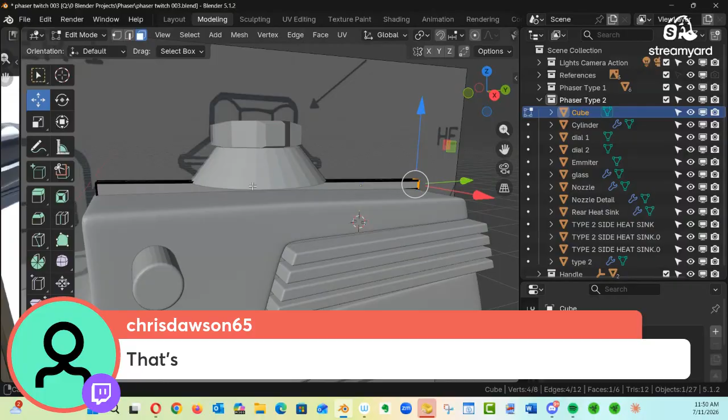Okay, I'm going to get out of X-ray mode and take a look at what I've got. Now looking at my phaser, it really doesn't come out that much. I'm going to hit the A key, and we're going to push this down so it's like this. That's about how much it comes out, right below the nozzle here.

Okay, last thing we're going to do is duplicate this. So we go back to X-ray mode, back to my top view, 7 key on the keyboard. Shift D, then hitting the X key on the keyboard, take it to right about there, right next to it. Okay, that works. These are pretty much aligned.

All I want to do is go grab this face on the interior, because we're going to mirror this, and I want that face on the interior, hitting the N key on the keyboard. I want that to sit right on the 0 axis for X there. Once that's done, X key and delete those faces. All right, tab key, object mode, get out of X-ray mode to see what I've done. Yep.

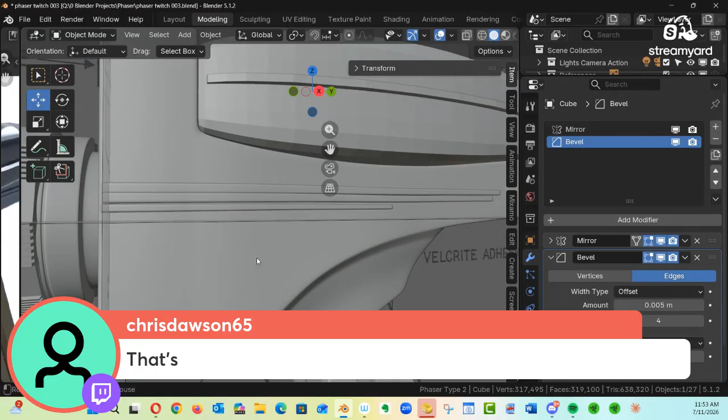All right, so I think we're not really done. I forgot, we got to get the dilithium crystal chamber done. That's basically a cylinder. Almost forgot, there we go. The dilithium crystal chamber right here. So the dilithium crystal sits, a small portion of it sits right inside here, which causes the phase energy to emit. We got another little interior nozzle inside the main nozzle as well. That's easy to do, we'll do that later.

All right, so I'm going to hold shift and then right click, I'll put the 3D cursor where I want it. And I want to bring a cylinder there. So let's do a shift A, go to mesh, go to cylinder, rotate it on the X axis. Now I've got 32, I'm going to go 16. Rotate it on the Y axis, RY 90.

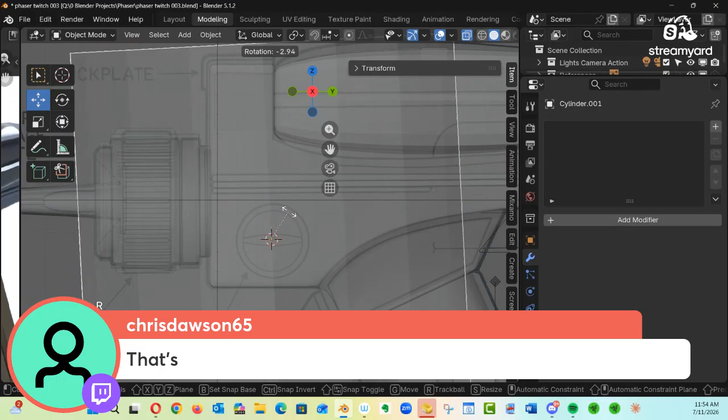It's there, let's make this smaller, get in a little closer. S key for scale, and I'm going to line it up according to my reference. There we go. Okay, all right, that works.

Go to the side view, and before I push that on in like so, I'm going to make some adjustments. That's going to be fairly flush with the body. Let's open it up, let's go ahead and do a little bit of magic here. Control A, rotation and scale.

Tab key, edit mode, grab that front face. I for inset. Right, and we're going to take a look at this. I'm looking at mine as a reference, but I'm going to take this and extrude it inward a little bit. E key for extrude, push it on in like so.

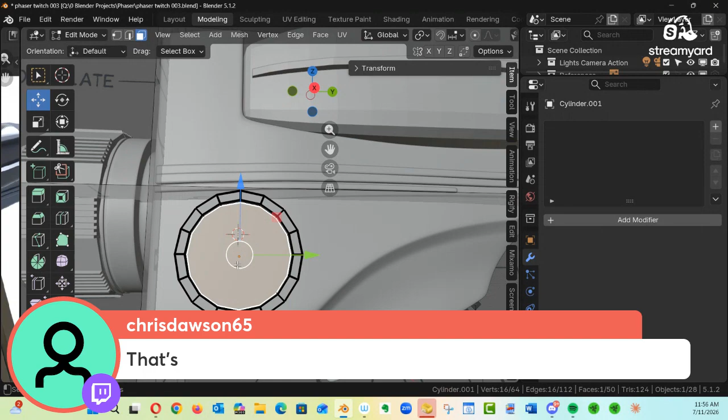So let me select this out. Let me hit the X key and select all those faces. Go to the edge editing, select all the edges. And I believe it's under face, grid fill. There, see? So now we have all quads.

Okay, the advantage of this is now that with the grid fill, I can adjust the offset a little bit. So watch, see what I'm doing?

I'm just kind of rotating around and finding out what's the best way. I'm thinking like trying to line up this one and this one. If I can, let's go over here. That may not be possible.

I've got 16 here. Maybe I want to go odd numbers in this example. I'll tell you what, I'm not going to worry about it, because there's another way I can handle it. Let me push this all down like so.

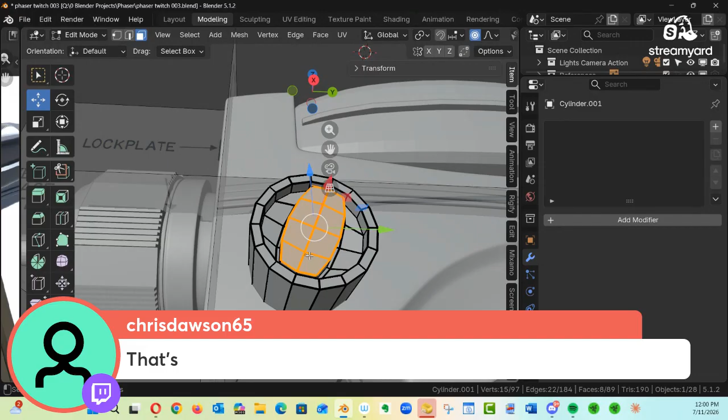Now, right click, flatten. There it is. Okay, so I'm in global now. Let me see if I go to local. I want to see what changes with the orientation and go to normal.

So I need an orientation that's going to help with this. I want to restrict it to, as you can see, next I'll bring up my annotation. I want the orientation to accommodate this shape. Okay, yeah, it looks pretty good.

Now I need to set up a new orientation object. So to do so, I'm going to grab one of these faces. I'm going to go over here, grab that face, and make sure that I'm in normal blend mode. Let's see what I get.

Yep, that's what I want. That's the orientation that I want. I believe I might be able to select all. See if as I select all of these, see how that shape changes? I just want that one shape.

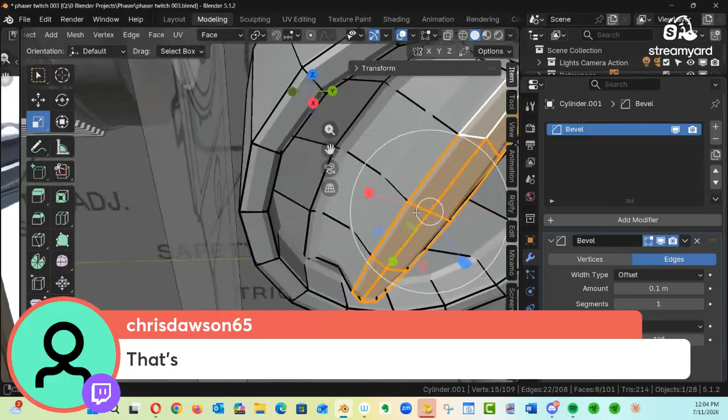And then give it steps of 4. Smooth it out like you can see. And all I'm going to do at this point is just give it a subdivision surface.

So object mode, because I want this to be smooth, because we're going to 3D print it. Go to my object mode and go to add, generate, and add a subdivision surface. And I want a levels viewport of 3 levels subdivision, and then 2 levels of subdivision. There we go.

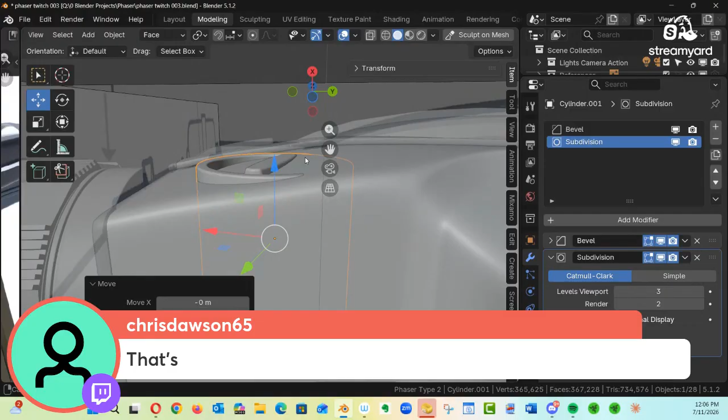All right, so at this point, I'm going to push it in. I got to get this oriented correctly for the rotation. In fact, we're going to come back over to here. We're going to be in a global view. There it is. So my orientation is set up correctly.

And pull this on out. Now, this needs to be inset inward like so, with the rest of this showing. So that means I'm going to have to create some type of a boolean in here.

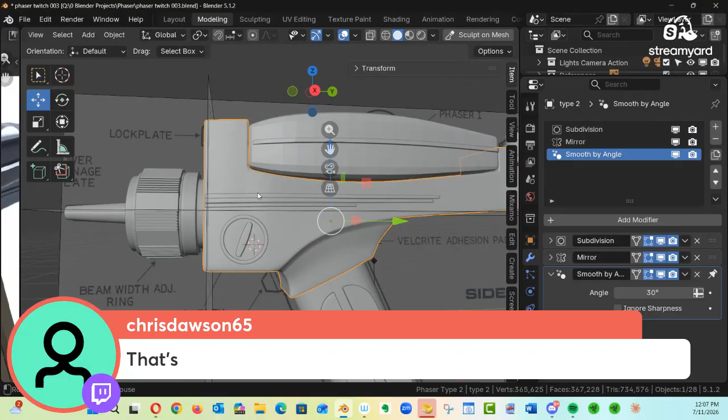I think I'll set that up right now. All right, let's go into the body. I'm going to see if I can actually do this from using the geometry inside the phaser. If I go to my edit mode, I might be able to do it actually. Maybe. It might be easier just to put a boolean in here. But if I add extra geometry in here, let's see.

Well, let me save this, okay? I'm saving that one. And let's see if I mess it up, I can always undo it. I've got it saved.

And let's see if... Control R, add a couple of slices here. That should do it right there. Okay, let's see what I can do. This is a little bit too close to the edge, but the photograph, I'm going to take a look at my phaser here. Actually, no, the photograph is saying the face of this should be up.

Actually, my actual phaser that I own says this is up higher. It literally shows this touching this up here. So I'm going to go with that. It shows it literally touching this bottom heat sink line.

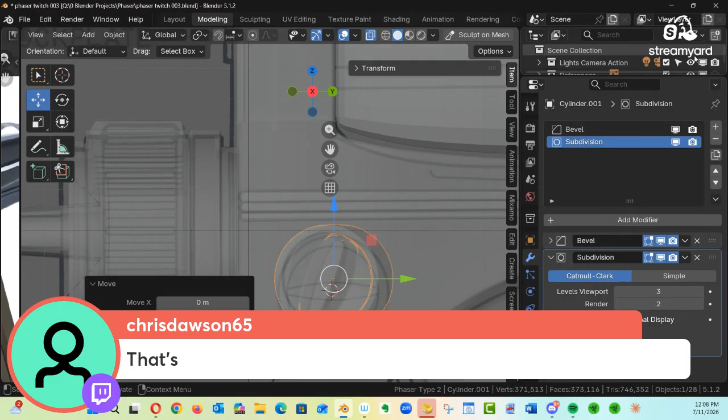Let me turn off my references just temporarily. So let's take a look at this. Okay, this will work.

Let's do this. So let's go back into the phaser body. We're going to go to edit. And the reason this is beneficial to me is because now I can take several of these edges and maybe make a circle from it.

So let's see what I can do with this. So go to face editing mode. Let's see if I can take this shape like so. And let's hit the right click on my mouse, go to loop tools and go to circle. It's working. Oh, this is beautiful.

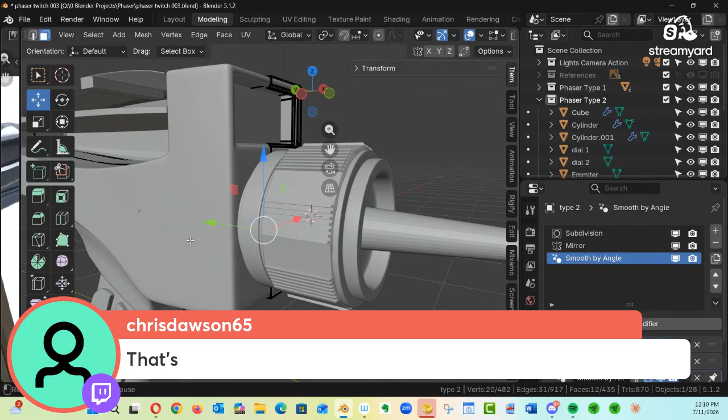Okay, but we can't do it yet. I'll tell you why we can't do it yet. Because we need to apply this shape, because right now it's going to be mirrored, right? So mirroring has been working perfectly for us up until now. When now they have all the details in, we need some asymmetry now.

So this is what we're going to do. Watch me. Let me go into object mode. I'm going to take the phaser. Let me go back to edit mode real quick. Hit A key. I'm gonna offset it like this. Well, before I offset it, I'm gonna go into the mirror command,

and I'm going to unclick the clipping. This is where unclipping the clipping is going to work for you. If I move it over, I've got this. Now, why am I doing this?

Because we want to 3D print this. So one side's going to have that dilithium crystal chamber, and the other side is not. So I've got to print these two sides separately. So I want them separated. So I'm just opening them up right down the middle so I can easily separate this.

So now I can go in here and work my magic. So now I can go back to the side view, and let's go back and turn on my references, X-ray mode, and go grab these faces here, all these. Right here. Okay, that's what I want.

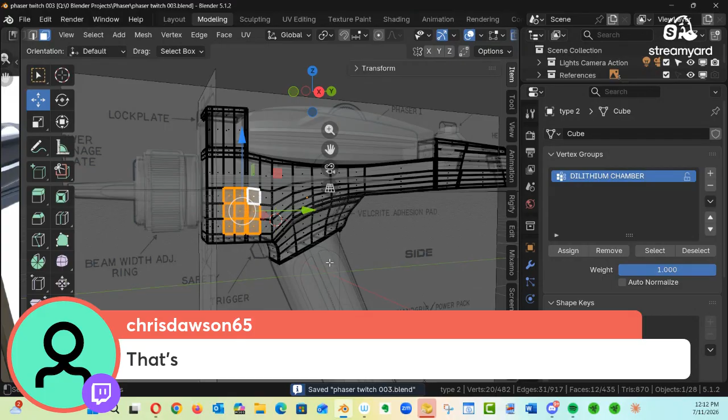Okay, that works. Okay, I'm hit Control S. We're gonna save everything. So I've got that there. So now, before we do anything, we got to apply our mirroring command, right? Then go back to the modifier. After mirror, what do I have? I got the smoothing, so that should be okay. So go to the mirror command and hit apply. Done.

So when I go into edit mode, watch. Tab key, edit mode. I got them. So let me get out of there. Go to object mode. So I got them both there, but I've got them separated a little bit, right down the middle, right? I got them separated a little bit, right down the middle. So now I want to do one little thing. I got this little area here.

I'm going to move them back in just a moment. But what I need to do is put one onto its own layer. So I'll select this side, go to face editing mode, hover the mouse over this side of the phaser, hit the L key, and that selects that whole side. Now I hit P for parts, make it a new layer, and there it is - its own separate layer now.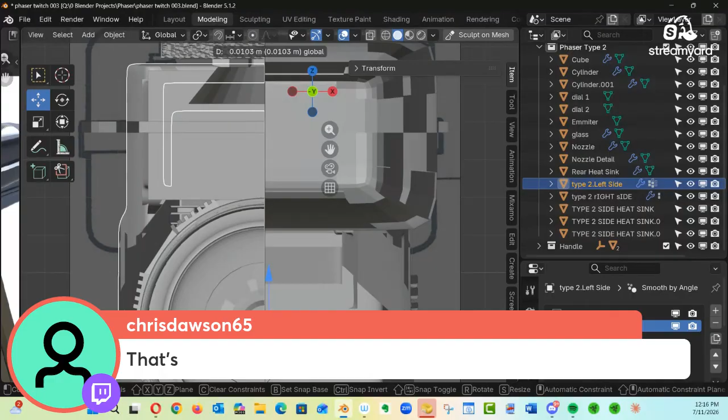Do the other side. Get in closer. Move that on over a little bit, like so. There we go - that way it's relined up with all of the detail, so everything is still symmetrical. So Control S, saving it. We're back in business, we've got our separate phase.

Now we can go back and do the detail on this one. Go to this body here, let's go to edit mode. Oh no, I forgot to do something - darn it, I screwed up. I didn't select it, I forgot to tell it to assign it. I was in a rush - this is what happens when you're in a rush. So I'm going to go grab these faces again, face editing mode, and I believe it's these faces that I want.

All right, let's see how well we do. Right click, tool, circle - oh yeah. All right, we've got to get the circle aligned properly. See, it's not quite aligned. Well, it's not too bad, but we can go to the angle and adjust it, do the best you can. It's not going to be perfect, and it doesn't matter in the middle so much anyway.

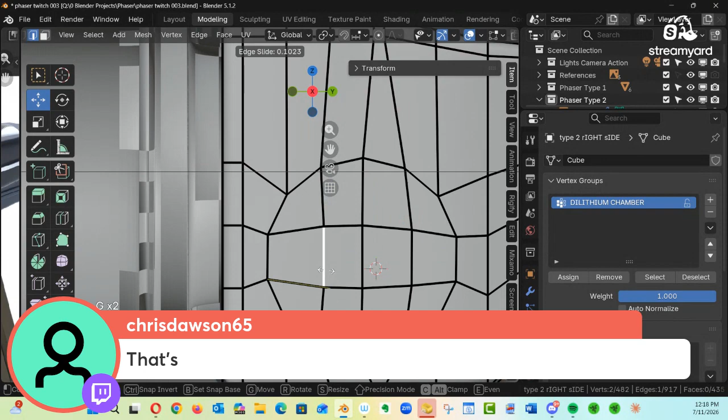We can go to the edges here if we want to, select that edge and double-G it, and just align it up like this. Select that edge to go to the center and double-G, and line it up. Same thing for that edge, double-G. If you want to get anal about it to try to get it looking as clean as possible, that's how you'd handle it. See?

All right, now let's select these faces here, and hit Control Plus to pull it out a little bit. And I'm going to go to my orthographic view, X-ray view, and I'm going to have to go grab - I think this is much more accurate, yeah, this is much more accurate to my phaser.

All right, so if I go back to object mode, let's go back to my dilithium crystal chamber, let's see if I got it handy here. Let's go back - there we go, that's it there, it's under cylinder. Sure is. Let's say that one is dilithium - take the J out of there - dilithium chamber.

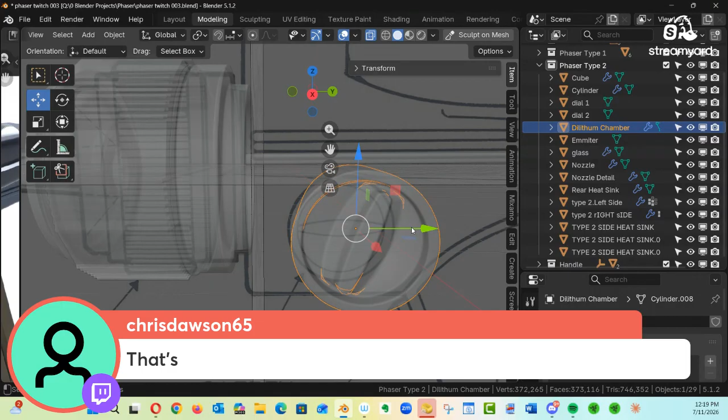All right, and let's move it around. Go to my orthographic view, and we'll just have to move that around. Actually, I can't see it against the background. What I have to do is come up here - let's go to my overlay view, come down and go to wireframe, so I can see the wireframe, and I can kind of sort of see it in there, kind of like...

Well, I'm going to have to wait until I bevel all this out - so I'm jumping the gun here. Let me get out of here, go to object mode, go to the body, edit mode here. Okay, two things you want to do: you want a controlling edge from this circle, because we're making a circle out of boxes. I for inset - there's my controlling edge right there.

What do we do next? You guys already know what to do. E key, extrude it in. There it is.

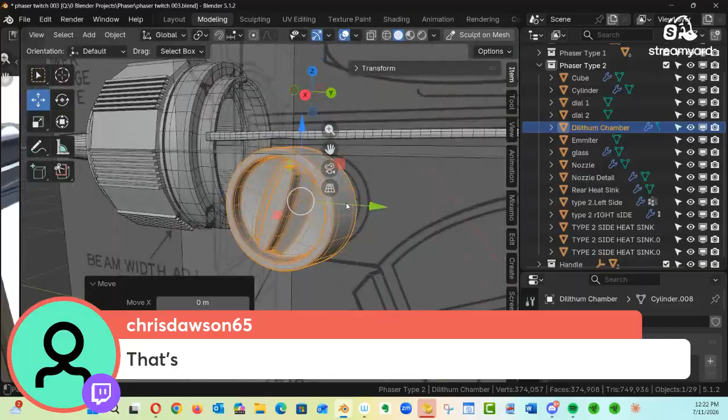All right, so we get out of here, object mode. Come on, object mode. You can see all the geometry flow. It's not bad. Not perfect, but not too bad. Didn't have to boolean anything out.

Go grab that, looking at, and this is actually going to be pushed inwards like so. Oh, that got moved back there somehow. That's kind of weird, how did that happen?

Go to top view. Make sure that's right. There you go. That's why it was looking kind of odd.

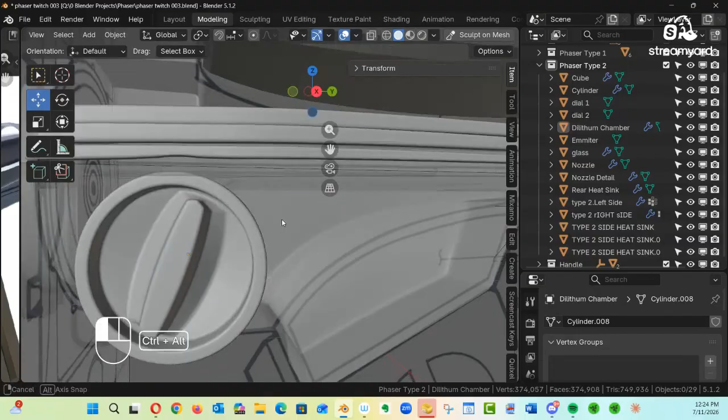All right, I'm going to turn off the wireframe overlay. Looking at that closely, these edges may be a little bit too rounded here.

So I think what I'll do is one last little thing to this, to the body. There we go, get this body, get this side here. I want the body on the right. There we go. And go to edit mode real quick.

All right, a couple of things I can do. One is I'm going to grab that interior. This is a little bit large.

And then I'm going to hit Control Plus on the keyboard to extend it out a little bit more. I'm going to have to eye this because this is a little bit further out, a little bit larger than I want it to be.

So I'm going to scale it on the Z axis and the Y axis, but not the X axis. I want the X axis to be untouched. So I'm going to hit S for scale. Kind of pull this a little bit further away so we have a little more real estate here.

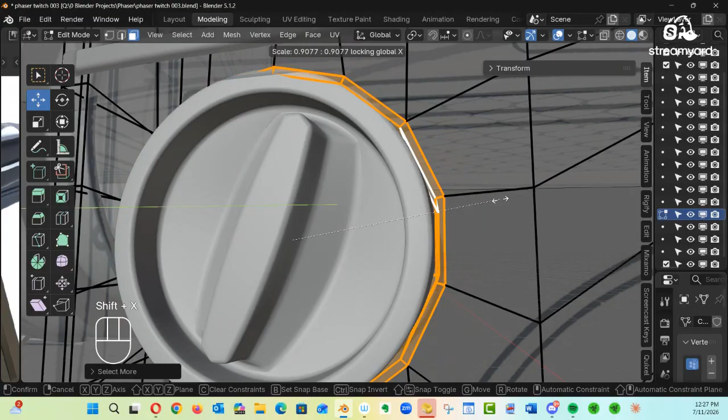That is not working the way that I want it to. I said Shift X, right? There we go, now that's working. I'm not hitting the buttons all the way down. That can happen, my students do it all the time. It's kind of like, Steve, I did what you told me to do, but it's not doing it because you're not hitting the buttons all the way down, just like what I just did.

Cool, that's better. So I want to go and edit this little button now. Quick little shortcut here, Alt or Option Q will automatically jump to this. A key for select all, and just move it over a little bit like that. That should do it. Alt and Q again, or just get out of here. Go to object mode.

There we go, that's much better. That's much better, you know, move that over. Yeah, that's much better, yeah, that looks good. Okay, how's that looking, everybody?

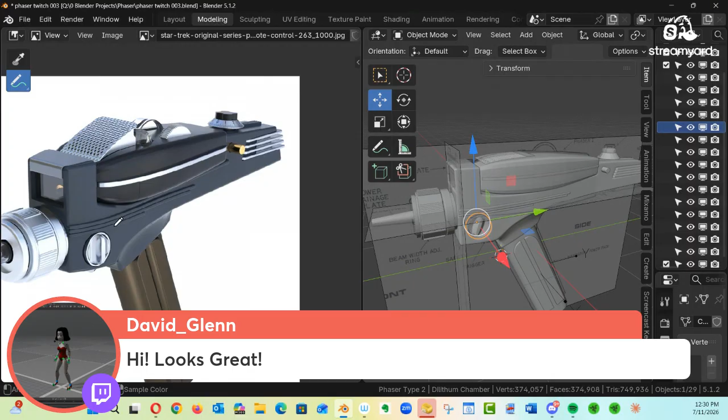All right, so let's go do the phaser type 1. Let me just go look at my reference, make sure I've got everything I need for the type 2. Yep, I got the details on the top, got the grids in, got the sides in, got, yeah, all that's looking good, okay, handle's done. The nozzle we did last time, two weeks ago. So we're ready to go.

All right, here we go, so let's do the phaser type 1. Easy peasy, we did most of it already, it's mostly done. Let's go add, let's see, let's go take a look at our reference here. We need to add something else. Let's go to the top view, I'm going to have to add more images in here, so on this side.

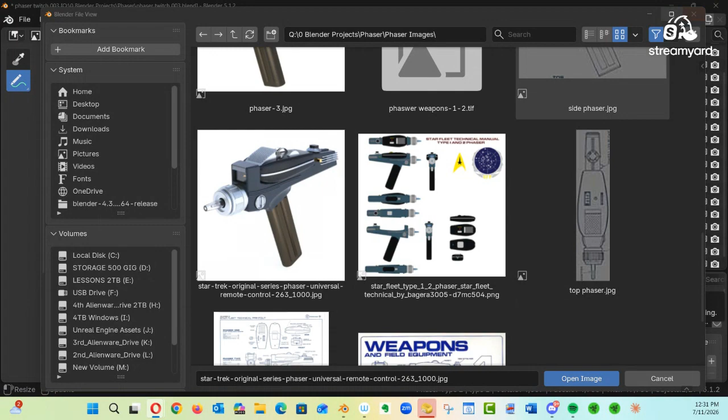Images, open images. Let's go to my reference images, so phaser images here, there we go. I've got that on the top. Let me see if I've got something from a top view. Really interesting, it was hard finding top views, the only top view I've got is the reference image. So maybe what I'll do is just utilize that for now because it's not too far off. So I'm going to click OK. I already have it up here, so if I bring it, the top view right there.

All right, so we have this dial, and we have this magnification dial here. Okay, so let's do the magnification dial first. And I'm looking at my actual phaser, and it's pretty much the same circumference as the dial, as the hand dial, the finger dial here. So we'll work with this one here.

All right, this is going to go on the type 1 now. So I'm going to just select, close up the type 2 folder, and just click on the type 1 folder. I'll just click somewhere inside here so that whatever I do will be listed in there. X-ray mode. All right, here we go.

Let's go have some fun. Let's Shift S, let's go ahead and bring the cursor here. Shift A, let's go over to bring in a cylinder. Rotate it on the X, R on the Y, RY90. And I want to make sure that this is the default. Oh crap, I got to do it over again, because it's not the amount of sides that I want on this one. Shift A, mesh, cylinder, for the cylinder give me the default 32.

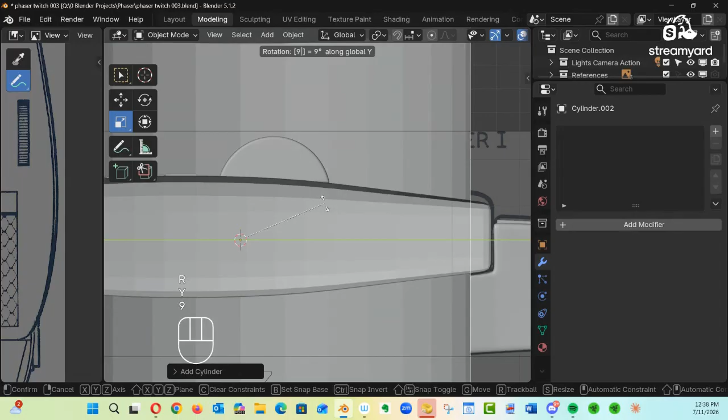And go directly to the side, do the same thing. So Shift A, go ahead and give it a mesh, and let's give it our cylinder. Rotate it on the Y axis, so R Y 90. X-ray mode, I'll just move it up manually, get as close as I can. S for scale, pull it down like so. We got those ridges, and we have an interior.

Kind of a beveled interior. Well, on my phaser, there is no interior. Well, actually, there isn't an interior. This is smaller, I see. Silly me. Let me bring this down, that's about right. It just comes down a little bit lower.

And I'm going to leave this as a full wheel because maybe the buyer of this 3D print is going to want that wheel to be free to turn. So I'll keep it that way. So I'm going to go to my front view, get out of X-ray mode. We'll bring this over to here. There we go. Go back in X-ray mode. Scale, and scale it like this. Okay.

Okay, so from here, I'm going to give it a little bit of an interior. I think it looks more handsome. So before I do anything, Control A, rotation and scale, apply it, edit, grab these two faces, face editing mode, go to both sides. I inset something like this, Alt E along normals, and push it in like that. There we go. That looks more handsome.

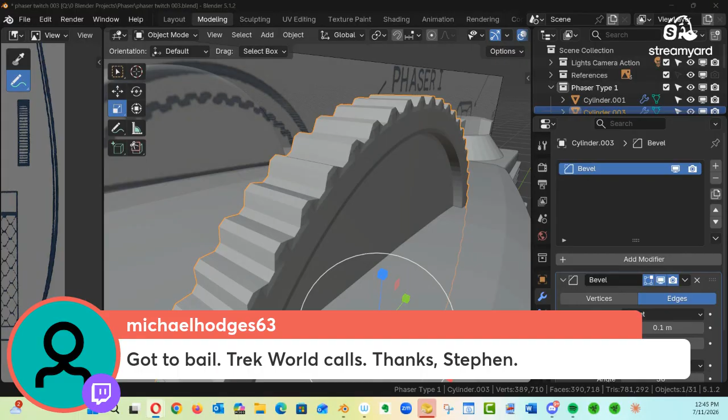All right, so let's see. Got to bail, Trek World calls. Okay, you're welcome, see you soon, Michael. Um, let's see, we got... is there a trick? Oh yeah, trigger's coming. That was Michael, but Michael's gone, so Michael's gonna have to watch the broadcast.

So I'm gonna modify the amount here. Notice that when I hold Alt, Option and Control down together, I can left click and drag this up and down to resize these panels, just in case you didn't know that. And I'm going to bring this down a little bit. See? Yeah, that's better.

Let's add a few more segments to it, like that. And four, there we go. Nice. That's good. That looks good, we're making progress.

So all we're going to have to do next week is texture it, so it's going to look exactly like the real thing. Texture it and light it. We're going to do texturing, lighting, and rendering next week.

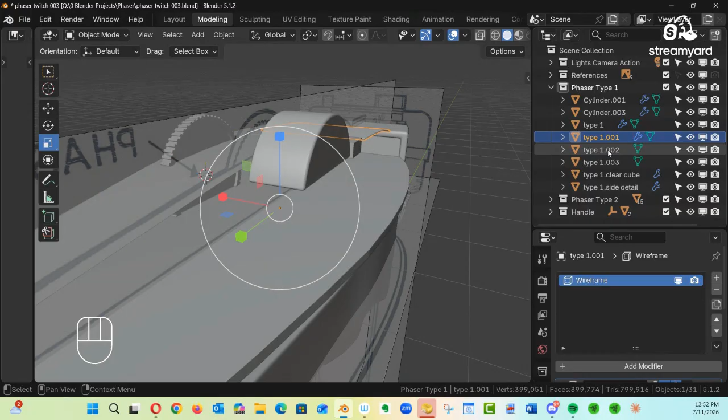Maybe I can do it this way. How about if let's see if I can grab this. Sometimes it's a little bit tricky. Let me go to the type 1 drop list here, phaser type 1. That would be, let's see, it wouldn't be the cylinder. I'm just going to click on each of these until I get the one. There it is right there. Go to edit mode.

X-rays, all right, so maybe what we could do... I'm going to, it's not what I meant to do. Pull this on down. Maybe what I can do is etch something in here really fast. So I've got these faces here, and this is one complete edge. So what I'm thinking of doing is this. This may be helpful, it's going to be an Ngon, but for 3D printing it's not going to matter.

There's going to be, it'll work. This one will work even as an Ngon. So I'm going to give it about, say, one, two, four sections here. So right click, subdivide it, subdivide it into four sections. So if I go to the point editing mode, there we go.

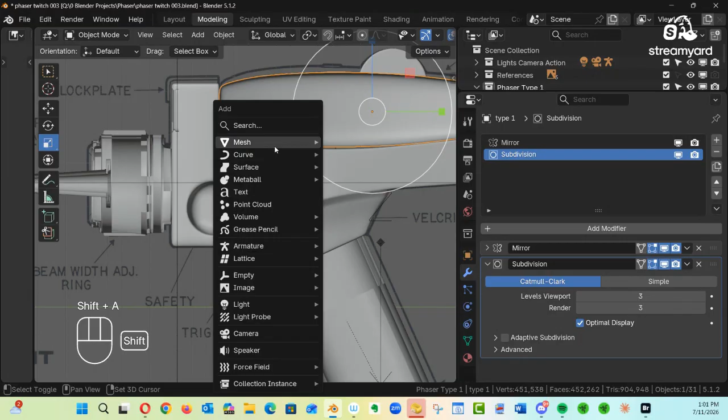Last thing is a nozzle, that's easy peasy, I'll do it right now. So we'll go to the side view and shift-right-click, put the 3D cursor right down here. Let's go to Shift A, mesh, let's go to cylinder. I don't need 128, I guess 64 will be fine - that's too much too, let's go to 32... 64, that'll smooth it out better. Okay, all right, so X, rotate on the X 90 degrees.

There we go. S for scale, bring it on down. R for rotate, right there. I'm ignoring the photograph, hit S for scale again, make it a little bigger, like there - I'm ignoring the photograph because it's not accurate to the real phaser nozzle. The real phaser nozzle is a complete cylinder, and that is it.

There's a little bit of a bevel around the edges, but that's it. Pull it right down here to the dead center of the phaser. Push it down just a little bit, right about in there. Yeah, that's it right there. That is right there is the kind of... get in close. That's the nozzle.